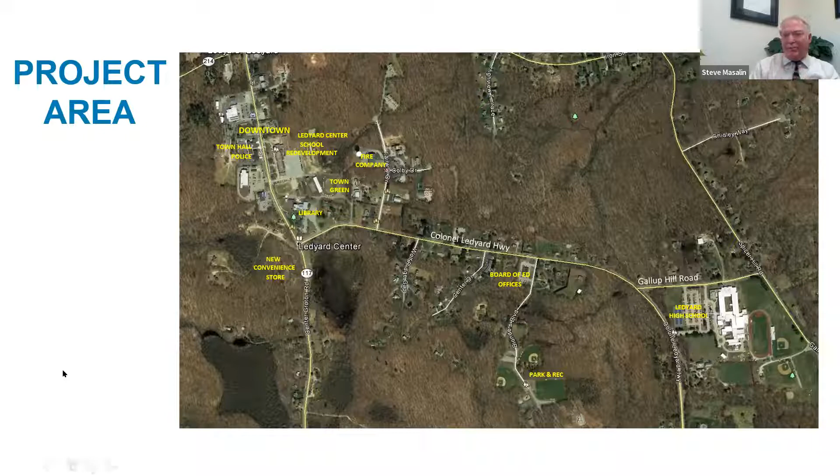This is being handled under the LOTCIP program. There's a description of the funds. As a town, we fully fund the design, which is almost complete now, and then the state funds construction. This is not a federally funded project, so the coordination is with us, the Southeastern Connecticut Council of Governments, and the Connecticut DOT. Those are the three main parties involved, for us anyway, in the southeastern corner of the state.

Weston and Sampson, I'll mention, this slide presentation is largely the one they made for the public presentation required for LOTCIP. They did a great job in a number of ways, so I simply leveraged their slideshow, trimmed it down, and adjusted it here and there for our use.

So existing conditions, there's 4 slides here to look at. If you were going from the west side to the east, this shows what we're working with. You see on the top left corner there's an existing guide rail running north-south along Route 117, in the area Mary is highlighting. We're going to make an improvement there as well, a pedestrian sidewalk to connect it to the new Best Way Citgo convenience store and gas station.

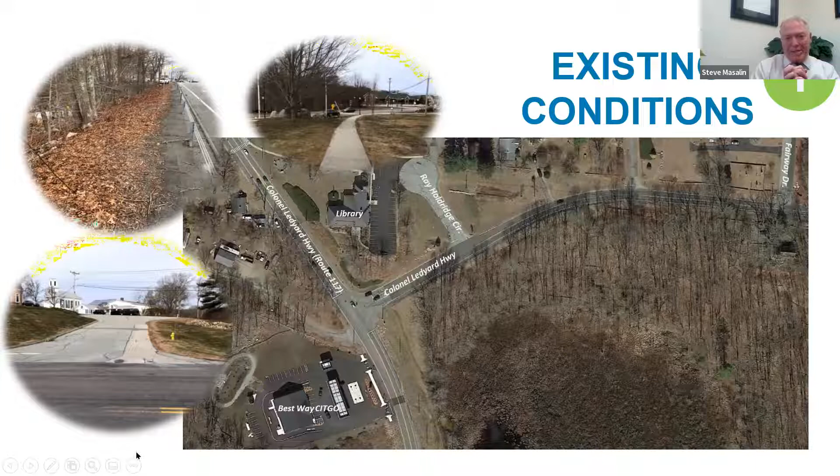Here you have a lot of residential property with a couple of mom and pop commercial outlets. This shows typically what we're dealing with in terms of the shoulder in those areas with residential properties, and you can see that it's tight. You'll see where we end up choosing to put this path, either north or south of the road, in close proximity to people's front yards. So it's going to be something very new for people there.

We have not had any pushback on this, but as it becomes more known and people see things in action, we'll be answering a lot of questions. There's a mom and pop restaurant right there, and down on the south side toward the east is Center Drive, with a little motorcycle shop. This will provide interconnectivity for patrons as they walk from the library, the Board of Ed building, staff, and others from the high school. It'll help a lot with pedestrian traffic in those areas, and certainly bicycle traffic as well. Okay, we'll go to number 3.

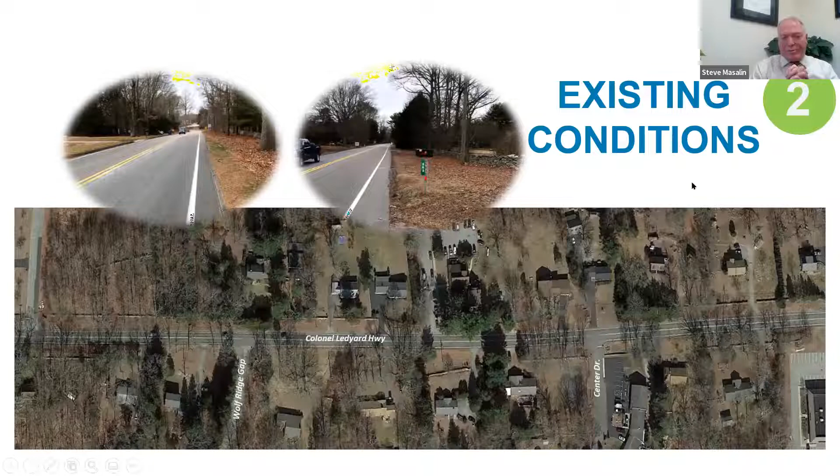This is where we get into some of the challenges for this particular pathway. You see the grades behind the guide rail, and this came into our selection criteria as we'll see further. As we approach the intersection for the high school at Gallup Hill Road, on both the north and south side we had grade issues. There had to be a tremendous amount of fill to achieve the kind of profile needed for the road in that area, and it's a super elevated stretch of road, as state standards would dictate. That comes into the safety issue in terms of speeds coming to and going through that area. So now we've got to put a 10-foot wide pathway with a buffer to the road edge or to the guide rail behind in those areas. It's a pretty good challenge here, and we'll see some of the profiles or sectional views of what's proposed.

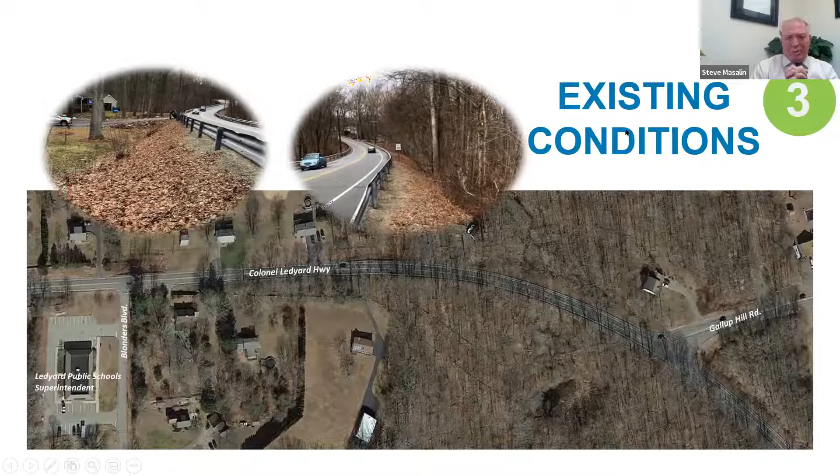Next slide shows more directly the intersection that takes you to the high school. You can see it's a Y intersection here. As you'll know, with a Y intersection, especially access and egress to and from the north, people really fly and maybe even run stop signs there. So it became a challenge for locating the crosswalks and reorienting that intersection to mitigate speeds in that area for pedestrian traffic that would be increasing there. You'll see in the design how Weston and Sampson accommodated that as well.

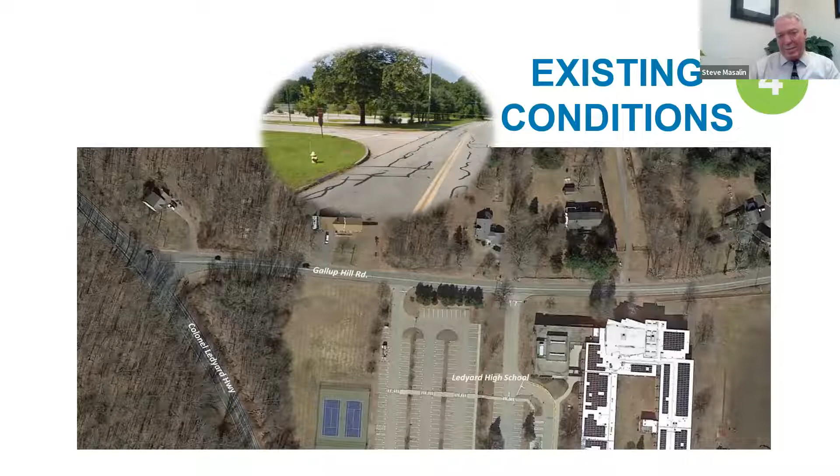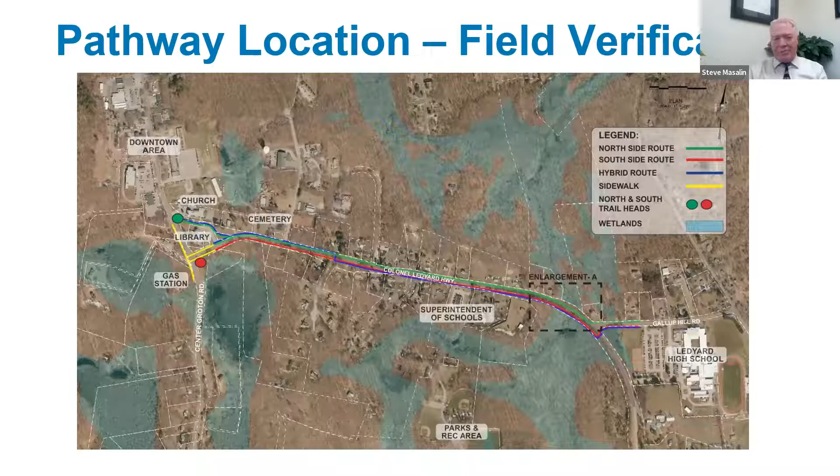So, short of the weighted score at the bottom, you still see that the north side was marginally better than the hybrid, but markedly better than the south route. But then when you do the weighting with the different categories, you see it brings separation, certainly marked separation between north and south, but even between the north and the hybrid.

So that is how we came to choosing a straight north way configuration. It didn't mean that the north was going to be without its cons. It just meant that on balance, it was the best way to go overall. And I thought it was a very good process and yielded a good result.

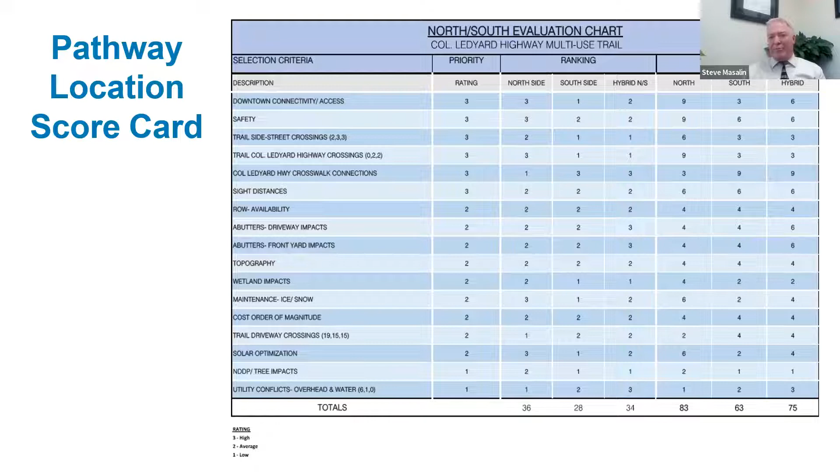And in fact, I was glad that Weston and Sampson presented this approach, because staff, between myself and the planner, we were pushing for a south side approach based on a limited range of factors. And so when they brought this up, it kind of clarified for us that, yeah, the north is the way to go.

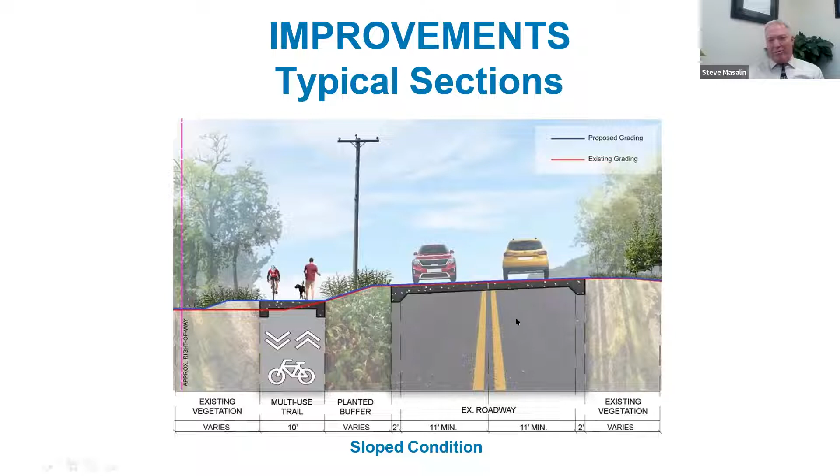Okay, and then the final section I think we have here. Now this is where you have a steep slope. And if you remember, in those sections approaching the high school intersection there, this is what we're dealing with.

So there will be some substantial cost there to provide a retaining wall that will allow us to have the fill we need to have a solid compacted base beneath the multi-use pathway.

I'll just say this, there was some thought, not for long, but there was some thought to using a wooden elevated boardwalk type of pathway. So you'd have pillars upon which this would sit, and we didn't linger with that too long. Yeah, we know it'd be an expensive proposition for the amount of fill we need to put there, but really from a stability standpoint, maintainability standpoint, you really need to have something where it's a solid fill scenario.

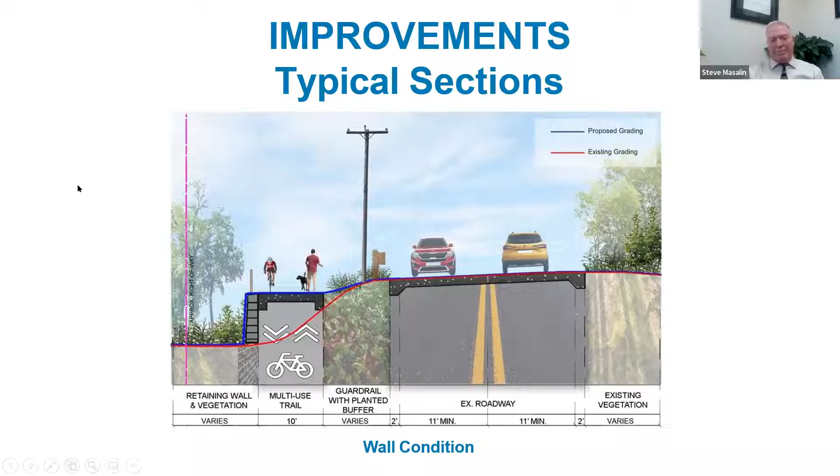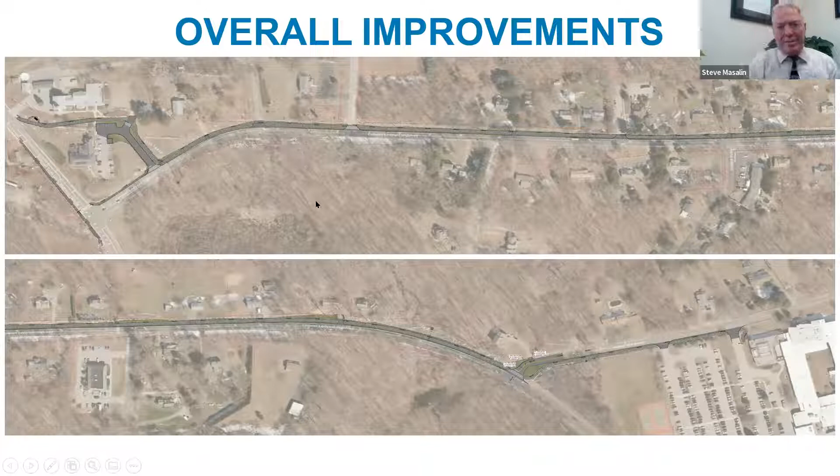So this, I won't linger here long because you can't see it. We got slides that will capture, again, the 4 sections of this as we go. You can kind of see in the darker gray what is proposed in the actual infrastructure. But what we'll do is go now slide by slide from west to east, and you'll be able to see this much more clearly.

So here we have the chosen north pathway, and you see on the west side of the road, the extension of the sidewalk. That's the standard, I think it's a 5-foot width sidewalk to tie it in. Then you see a sidewalk being taken from the cul-de-sac intersection to a proposed crosswalk at the north side of a signalized intersection at Colonel Ledyard Highway and Route 117.

So that's there. And then you see what we've done. We've eliminated the cul-de-sac and redone the parking configuration at the library. There's a church just above the library, and there's a community center attached to the church. So this will serve that complex. But you see how we've just turned it into a road that ends in a modified

parking area, and then you see how the new multi-use pathway is brought up, crosses the access that goes to the town green there, and ties in, eventually ties into the existing sidewalk and overtakes that sidewalk as it comes to Route 117. Now, there is not a 10-foot wide sidewalk at Route 117. It comes back to the standard width. It may be 6-foot wide there, but not certainly 10-foot wide. And then you see the pathway going on the north side of Colonel Ledyard Highway toward the east.

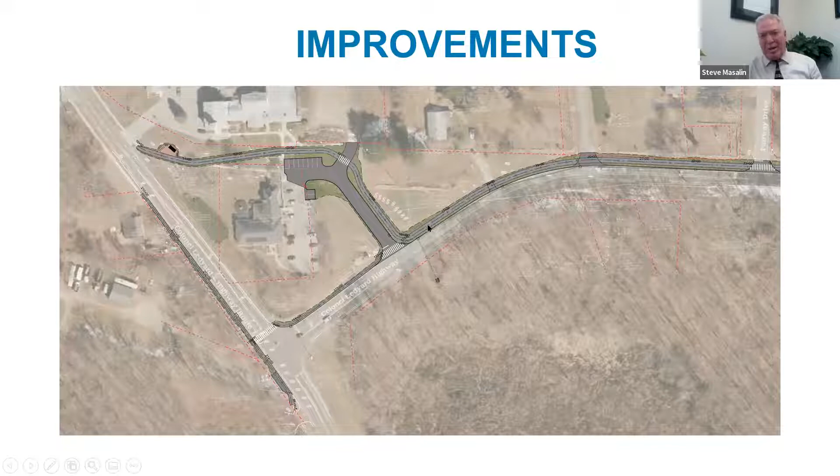Now, I throw this up here just to show this is the design that is proposed for the crosswalk at the state road. It's a signalized intersection. It turns out that the state is upgrading their signals at this particular intersection, so we have been coordinating with them on this. This is important because you have to get in as early as possible with their process to make this work. And it got a little bit out of whack here because we changed our mind.

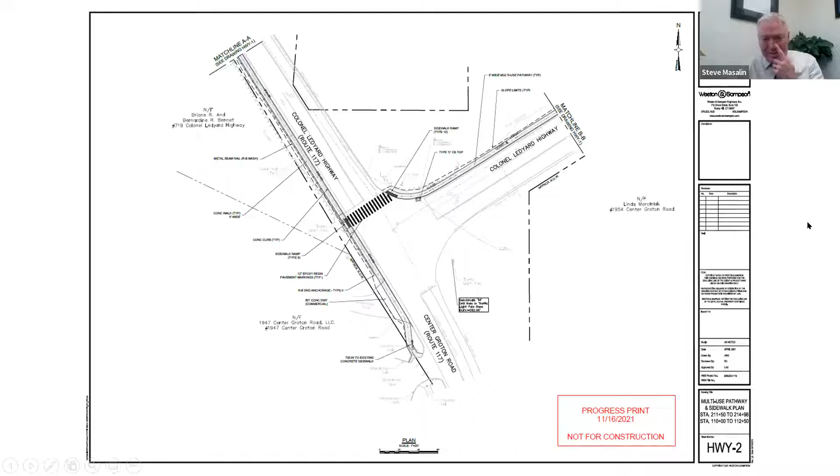And we're still working with the state to sort that out. But I guess the lesson there is, especially with their needs and their administrative process, nail it down as solidly as possible, as soon as possible. And it's just coincidental that they were looking at doing this at this time when we were looking at a multi-use pathway. So hopefully, I'm sure we'll figure out a way to make this work out.

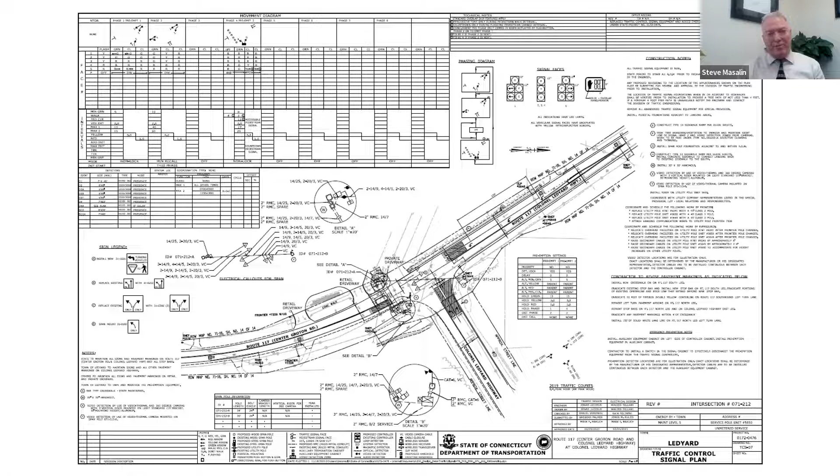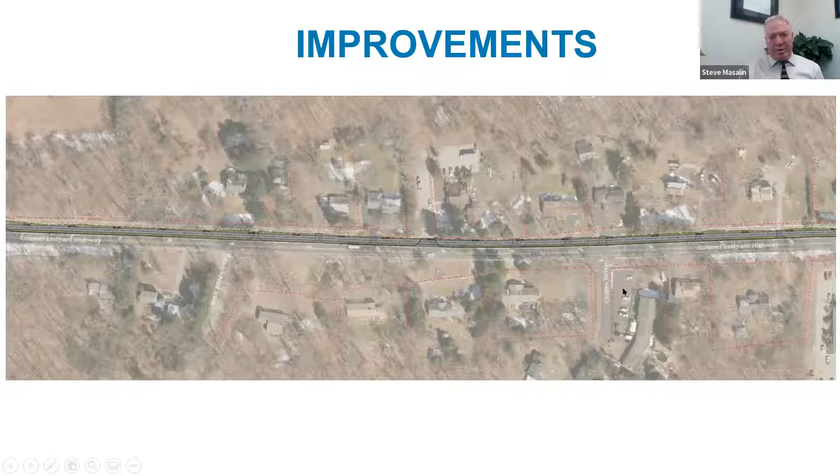And this is where we come into the major grading issues that we have to deal with here on the north side. We've got some houses that, and I should have pointed it out in more detail, but right there, those two houses, there are some severe slope driveways, and of course, to deal with that transition in such a narrow right of way, to flatten it out and then get back to their driveway is going to be a challenge. But that was one of the trade-offs here to deal with, and so that's a challenge there.

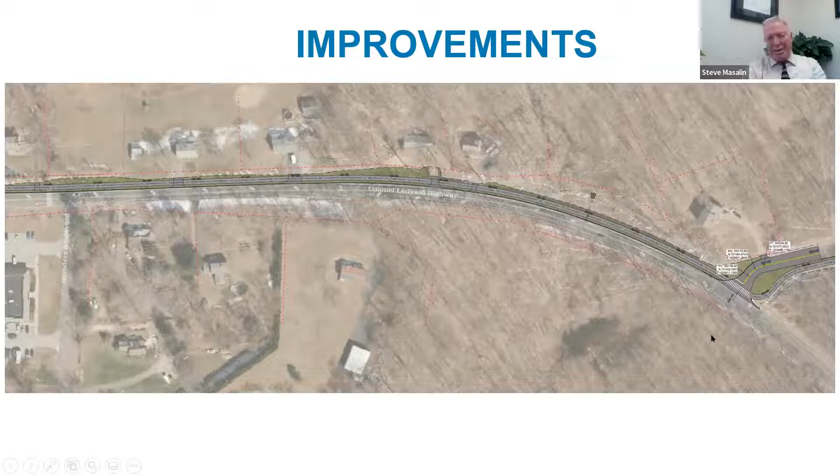And then as we move further, now we can go to the next slide, and this brings the intersection more into view. You can see the realignment of the intersection, and it's, I guess you call it, a traffic calming approach here, especially with traffic coming to and from the north.

Again, we shorten the throat of it so that the crosswalk is shorter, so you're not exposing pedestrian and bicycle traffic at the original length of the intersection, and you are forcing traffic to come to a stop as they enter Colonel Ledyard Highway and slow considerably as they're turning left onto Gallup Hill Road as they approach that crosswalk.

And then you see the multi-use pathway coming in from the high school there, and we're going to clear the sight line considerably to the south so that on the outside of the curve there'll be a considerable view, both of those entering the crosswalk and traffic coming from the south.

And then it just nicely takes you right to the high school, where there are existing driveways, and we'll bring, I'm sure we'll put bicycle racks and stuff there for the kids to leave it there. I think this will open up avenues for many at this certain stage of high school where they live in the vicinity to take their bikes to school or otherwise.

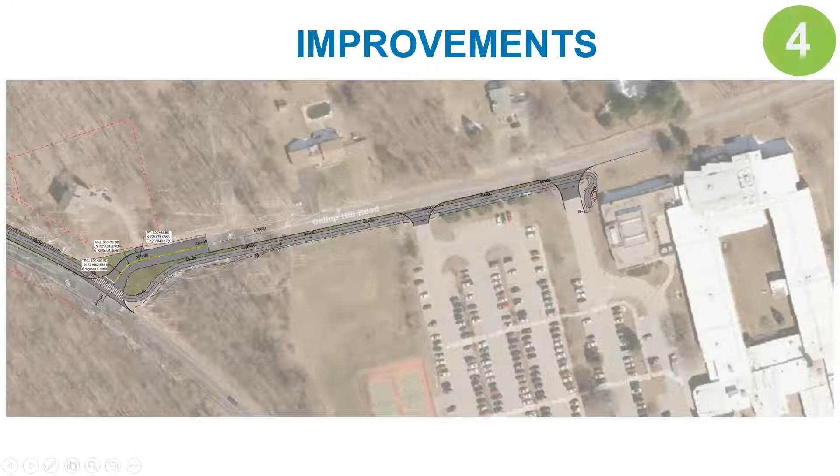This will be bid out, and we're planning anyway to bid it out as an integrated contract for all that work. It only makes sense to do that, I would suppose, for efficiencies and communications and all that. So we would have been probably looking at bidding already by now, but we'll probably be a year out or so, later this year. So construction next year for this whole package.

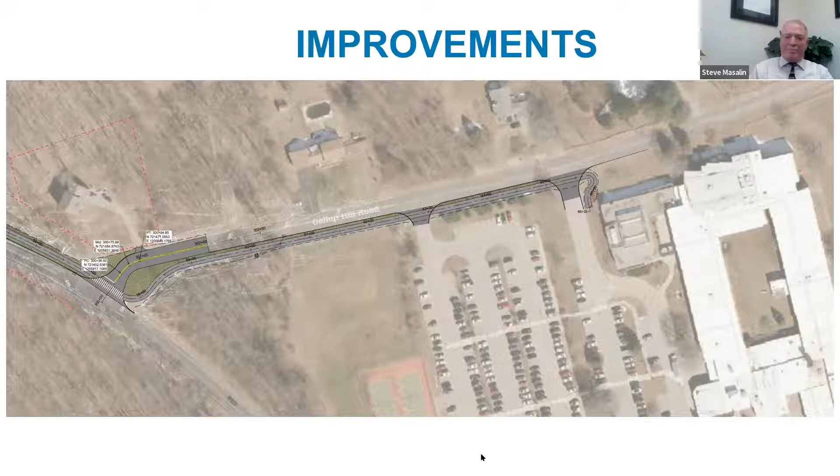Okay, so yeah, I think it just, when I heard about this project, I was talking with Kate from Southeast COG, and just trying to get a good rural perspective, and a project that a lot of towns in Connecticut may be interested in pursuing, especially more rural towns, and how to make those connections in a rural area. And so I really appreciate Steve agreeing to present this project. We do have a couple of questions that came through in the registration.

Some of them you answered, Steve, regarding the materials that are being used for the trail. I know you're going with bituminous. Have you had any thoughts about the retaining wall treatments, or have you gotten that far with things? No, I haven't. Yeah, I think you're gonna have to get out there and take a look and figure out what you need. And you mentioned installing some signage.

Will you be focusing primarily, at least at first, on the advisory signage and those where you are connecting or crossing roadways? Yeah, and I think it'll be really interesting, and an added feature if you can get some of that wayfinding and historical information out there for folks. Some good opportunities to partner with your historical society or Chamber of Commerce.